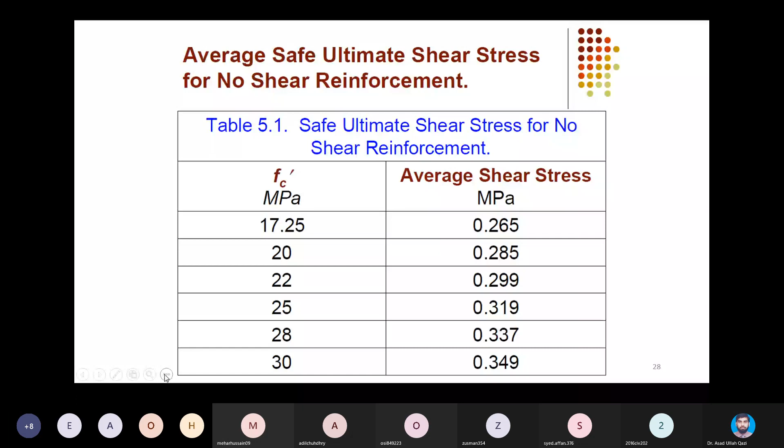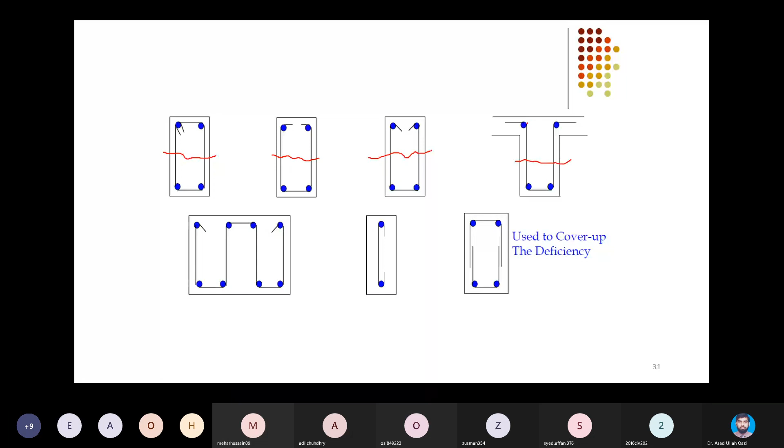In monolithic construction, this can be one arrangement that we are having a 90-degree bend, and on top the hanger bars or the main steel bars of the slab are engaged to hang the ties. Still not good for torsion because it is open from top.

It has four legs. Now when we need more area to resist the shear, we can increase the number of legs - single leg tie. This is one arrangement in which we are lapping the legs, and this is even good in case when you are actually extending the cross section, and just by overlapping the ties you are actually transferring the stress from one bar to the other. So this can be one arrangement to provide the shear reinforcement.

Obviously in that overlapping portion, if this overlap is not rightly calculated, then chances are that a weakened region will develop at this position.

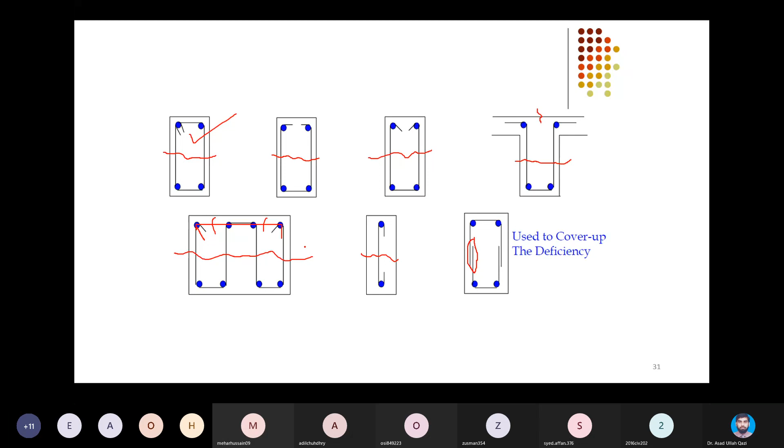So in order to handle the torsion, a closed loop will be more suitable. So area of steel means combined area of all transverse legs of stirrups at a particular cross section.

And I have drawn one picture that if there is a diagonal crack and ties are present which are bridging that crack, the spacing between the ties will be S, longitudinal spacing. At one section, the combined area of all legs will be the area of steel with subscript V, which is actually contributing at that section in shear resistance, and Vs is the shear strength provided by the stirrups at a particular cross section.

So if at one cross section we have area of steel, if there are two legs, as I have shown you on the next slide, the two leg stirrup present in the cross section, and in that two leg stirrup the area of steel used is number 10, for example.

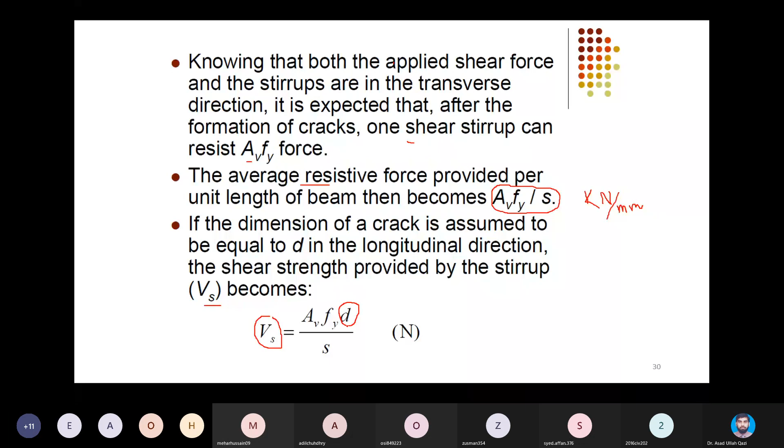So in this picture, I first calculated the force per unit length, then multiplied it with the distance on which the crack is present. This gives me the shear resistance offered by the steel. So AV is decided based on how many legs are present which are arresting the diagonal crack. In this above picture, we have 71 into 2 because there are 2 legs.

The shear strength reduction factor, according to ultimate strength design, that we will be using is 0.75. It is relatively lesser than the corresponding factor in bending, so it gives more factor of safety, firstly due to the sudden nature of failure, and secondly because of the larger scatter of the test results.

So even in the 2019 publication, with the proposed equation used to predict VC, the shear strength offered by the concrete, the capacity reduction factor applied is still 0.75. There is no revision made.

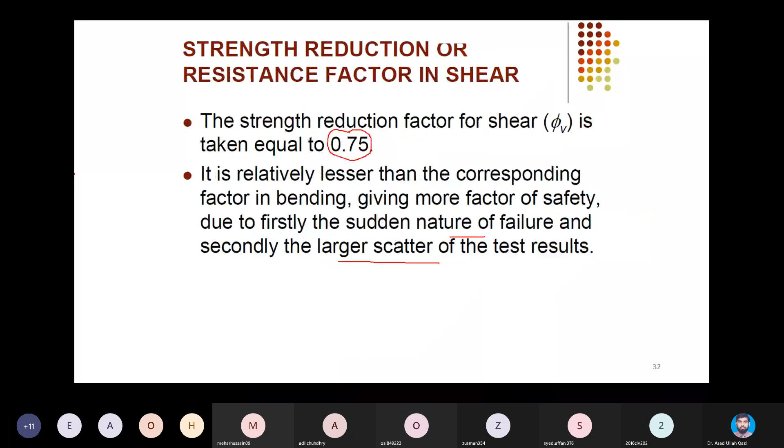considering factor of safety because shear failure will be greater, that provide minimum ties with area not less than, by using these set of equations, and from both of them larger will be selected, and it means I can write equation like this, that VU is

greater than phi VC by 2, but it is still less than phi VC. So it is greater, or even it will become equal to half of the concrete capacity, but it is less than the concrete capacity.

So theoretically speaking, shear is still less than the concrete capacity, and ties are not required, because if VU will exceed phi VC, then we will have a surplus shear which we want to shift to ties. But still, if the VU is less than phi VC, code will recommend you to provide minimum ties if VU will exceed half of the concrete capacity, but it is still below concrete capacity. But if it remains below half of the capacity, then you can ignore provision of ties.

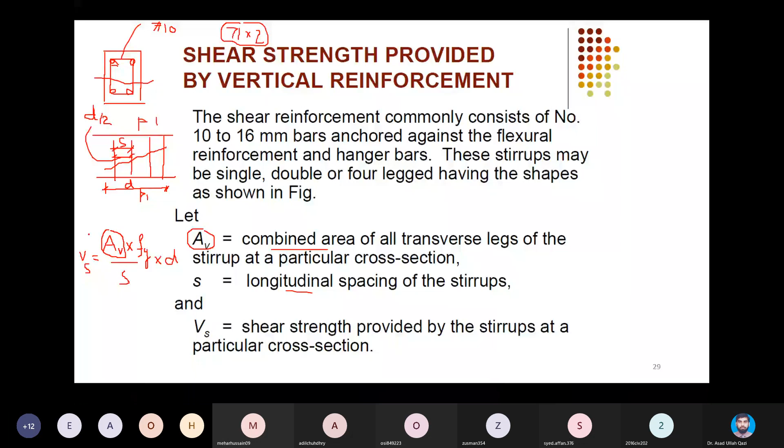So it is important to note that the maximum spacing limit of d by 2 is also required to be satisfied for this minimum web reinforcement. So once you will calculate the web reinforcement from this equation, the idea is that either you will put AV first. For example, I decide that I will keep S as unknown, and I will put AV first, and according to that AV, what spacing this equation gives me.

For example, if I decide that I am putting double legged number 10 stirrup, so I am putting this 2 into 71 here, that equation will then give me how much is the spacing between the ties, where minimum requirement is governing. So if this spacing comes out to be greater than d by 2, I have to provide the spacing not exceeding d by 2. So this is one choice.

Second, whatever spacing you have decided, d by 2, you will put over here - you know the effective depth of the cross section, and you will put d by 2 over here. What is the code maximum limit, and according to that you will calculate AV minimum.

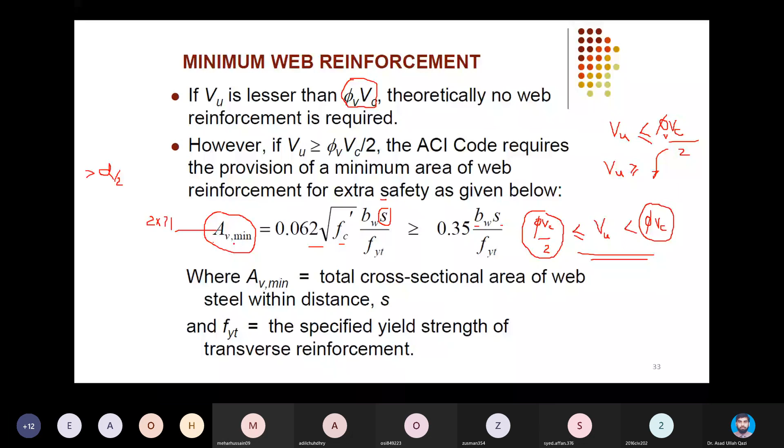Exceptions where this minimum reinforcement is not required are members that have capacity to redistribute stress across the width of the member, or in some cases to adjacent members, with examples being slabs and footings, and concrete joist construction.

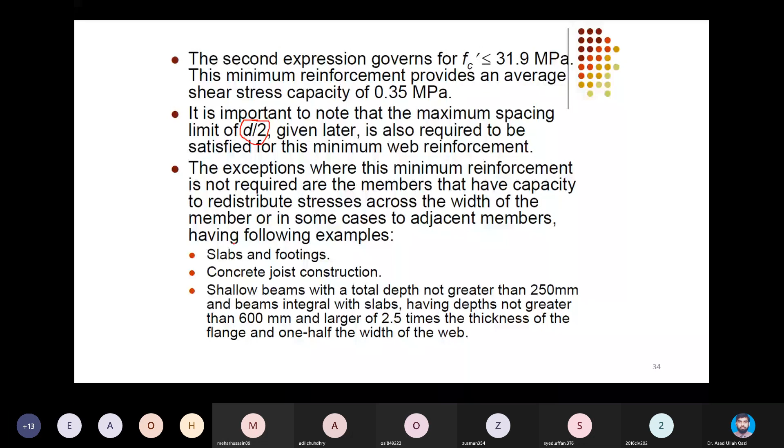These bullets are already explained on slide number 27. So when you have cases where AV minimum is not required, those cases are already summarized, so you can read them, because at the moment we are only discussing reinforced concrete beams. There are some exceptions which are summarized, which you can review later on.

One more important thing I want to discuss before starting the solution of the problem: for non-prestressed sections located less than a distance d from the face of the support, they may be designed for the same shear Vu as that computed at a distance d. So what does it mean?

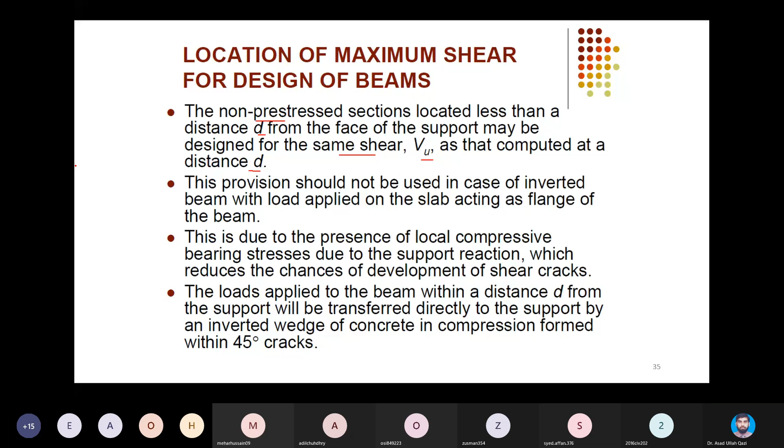I will discuss this from this picture: the code recommends you determine the shear force at a distance d, which is actually the effective depth of the cross section. So you can move to a distance d from the face of the support.

At that section, the shear force you will calculate will be the design shear force, against which you will check whether this VUD is greater than phi VC or not greater than phi VC.

So actually the design shear force is not at the face of the support. You can move to a distance equal to the effective depth, and this shear force will be considered as the design shear force.

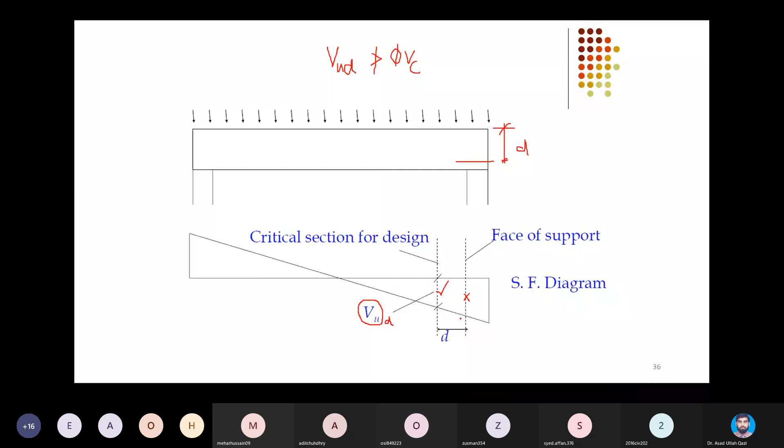What is the reason for this? This picture is good to understand. Look at the beam in which load is applied on top, and imagine if it is a monolithic construction, there will be a flange over here, the slab which is present.

And on top of it, load is present. So the load which is present within a span d from the face of the support will be transferred directly to this support.

This load has no effect on the stresses over a crack, while the load which is away from distance d from the face of the support - this load or the shear force at this distance - will actually affect the stresses over the crack, and the ties which are going to resist that force will actually be taking the share of the load which is beyond the distance d from the face of the support.

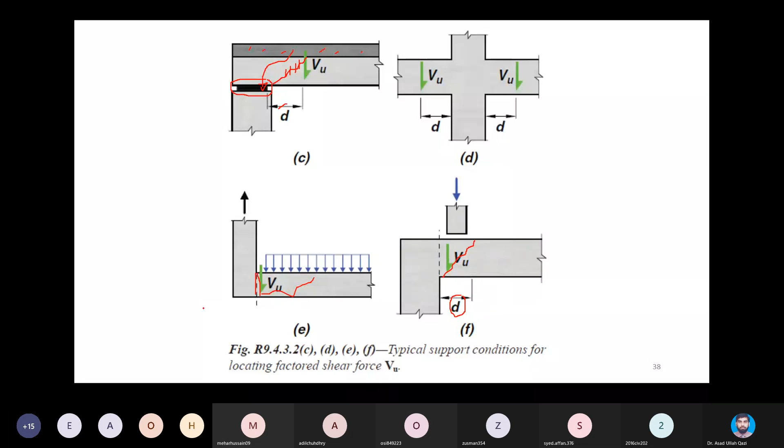If your beam is framing into a member which is subjected to tension, again in this case the critical section will not be at distance d from the face of the support, it will be on the face of the support. Such guidelines are present, and I have copied this picture from the ACI code. You can find some more pictures in that document which I have shared with you.

Now one more important piece of information: how much maximum stress we can pass on to the ties. It is not a permission - there is no permission to transfer surplus shear to ties without taking into account how much maximum Vs is permitted by the code, because if we transfer more extra shear to ties, it will result in widened cracks, and we need to keep the crack widths to a minimum.

So there is a limit given on Vs, and that limit is 66% of the square root of Fc prime. If the stress will exceed this on the shear rings, we need to then change the cross section, because we want more Vc.

So more Vc we can get by either increasing the compressive strength of concrete, or by changing the cross section. We need to check first whether our cross section is good enough, and if Vs will exceed this value, we need to revise the cross section.

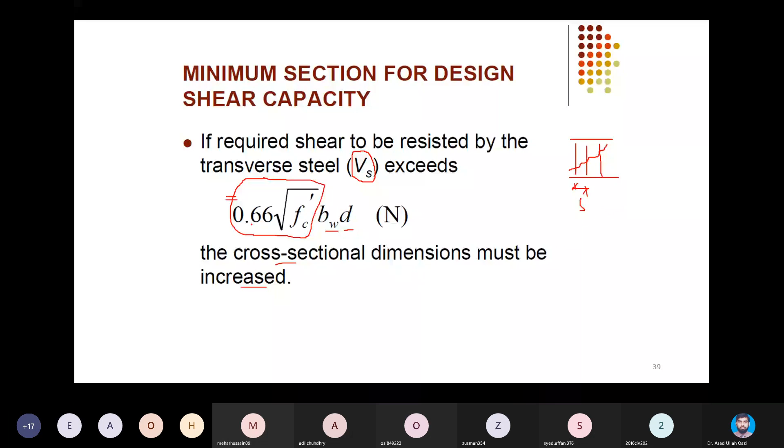Actually, the section is suitable if your Vs is less than or maximum equal to 0.66 under Fc prime. On slide 39 it was 0.66, and this is actually half of that - Vs divided by 2.

So if your Vs does not exceed 33% of under Fc prime, then the maximum allowed spacing between the ties will be calculated by a set of equations, and out of them the smaller spacing will be selected.

In addition to this, the fourth equation will be the design equation we have discussed, which we calculate based on the equation AV Fy D over S. We did this assessment on the previous slide.

So what we will do: we will have these three sets of equations, and furthermore, if our Vu is greater than phi Vc, it means we will have a surplus shear, and we will say Vu minus phi Vc, and that additional amount we will transfer to phi Vs.

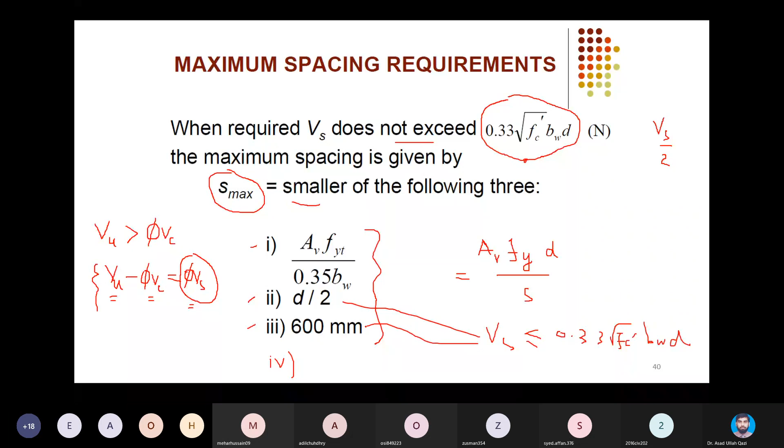less than or equal to 0.33 under root Fc prime BWD, then it was d by 2 or 600. Now since it exceeds 0.33, it is now dropped to half of that. So rather than d by 2, it is now d by 4. Rather than 600, now the requirement exceeds and the spacing drops to 300, half of the previous recommended.

So the spacing between the ties, maximum, should be the smaller out of the 3, and we will also put the fourth one, which is the actual design requirement, and that is explained here.

Now what I mentioned is that you have the nominal shear Vn, you multiply it with phi to get the ultimate. So this will be our equation according to ultimate strength design, and this phi Vn we are going to replace with the ultimate demand, the ultimate shear force.

So since, as I mentioned, if Vu is greater than phi Vc, what will happen then? It will be Vu minus phi Vc, and on the right hand side it will be phi Vs. So what we are going to do is calculate, based on that surplus demand, what spacing is required.

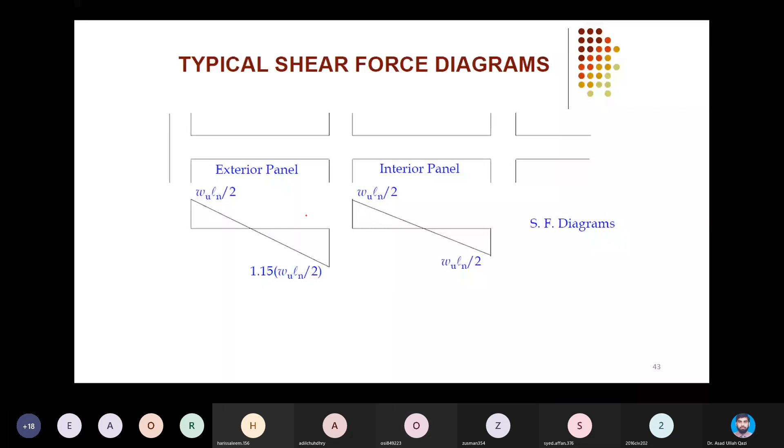Now there is a flow chart which I want to skip, because I am going to solve the problem directly. Once you go through this example problem, you can read the flow chart later, which will help you further understand the solved problem. This example problem is in SI units. I will also share with you one problem from the book by Nadim Hassoun, 7th edition, also in SI units. Both example problems are good to understand the flow chart of shear design of beams.

The beam has a clear span of 4.5 meters, and imagine that the support width is 300 millimeters on either side, 300 by 300. So if I want to determine center to center distance, it becomes 4.5 plus 0.15 from either side, so it becomes 4.8 meters for center to center distance.

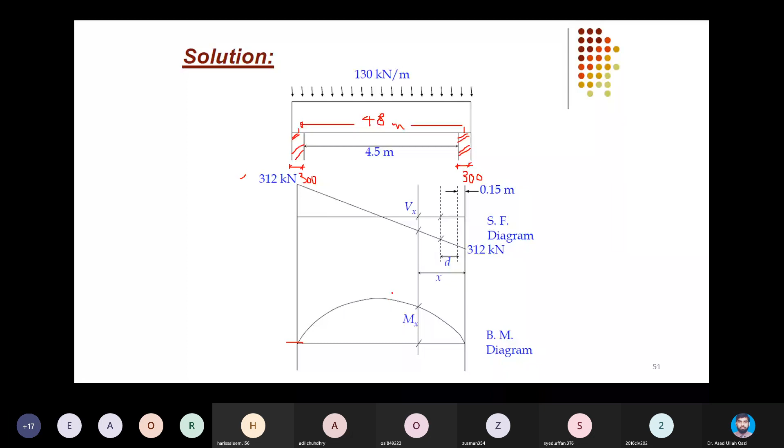Clear span is 4.5. You are expert in plotting shear force and bending moment diagrams. Plotting the bending moment diagram was mandatory when we were applying the equation proposed by ACI in the 2011 publication and also the 2014 publication. But now in the 2019 publication, they have provided more simplified equations, so calculation or application of the moment diagram in estimation of VC is no longer required.

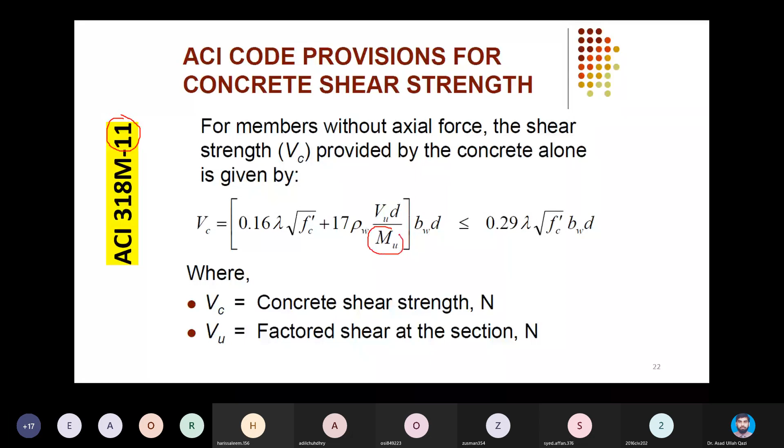Earlier codes required calculation of M because in our equation M was also present. Just to give you a hint about this, in the 2011 publication there was an equation which involved MU, but now I am applying the 2019 equation. There is no MU involved in calculation of VC, so it means the moment diagram is no longer important in calculation of VC now.

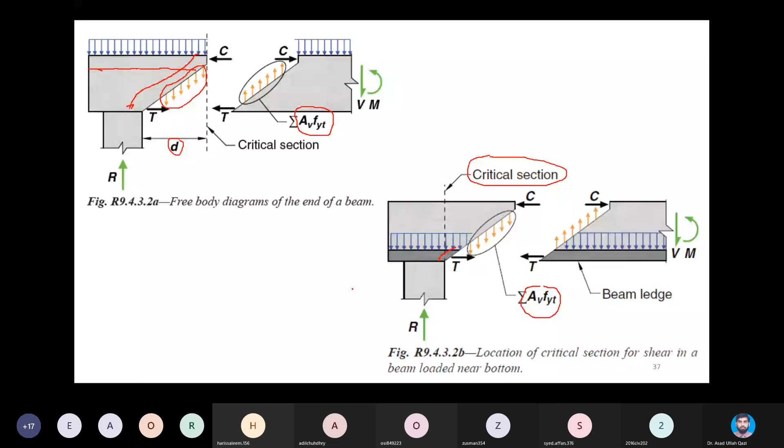They have now directly given you some multiplying factors along with the reinforcement ratio and the concrete grade. In one equation, the size effect is incorporated by giving you one coefficient, lambda s. So it is now more simple to determine VC by following the current ACI code equation.

As we discussed, load is present on top - imagine there will be a slab if it is a monolithic T-beam. Even if it is a rectangular beam, load is present on top and a diagonal crack will form. The load up to a distance d from the face of the support will have no contribution to the diagonal crack stresses and will be transferred directly to the support. So it is recommended to determine the design shear force by moving a distance d from the face of the support. We are not interested in the shear force at the face of the support; we are interested in the shear force at a distance d from the face of the support.

We can write the shear force equation. As I said, the moment equation is no longer as important if we are applying the 2019 equation. So our shear force diagram is obtained by moving a distance d from the face of the support.

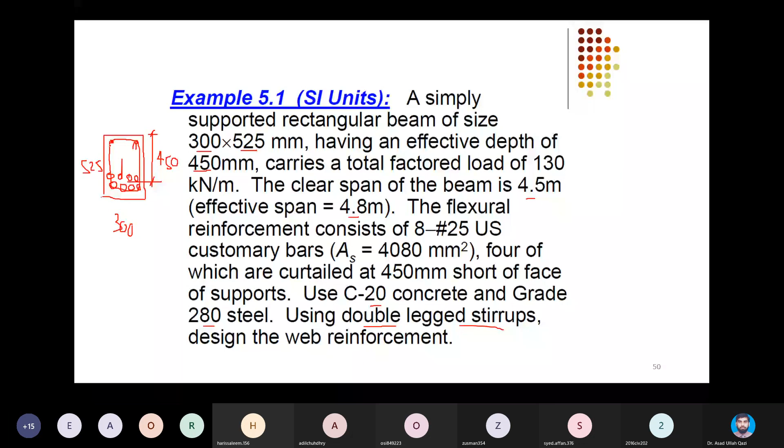The flexural reinforcement consists of 8 number 25 US customary bars, 4 of which are curtailed at 450 short of the face of the support. Concrete and steel grades are also given, and they are suggesting you use double-legged stirrups. That is the reason I have detailed it as double leg - one leg and second leg. So it is a double-legged recommended tie.

There is some idea given regarding the curtailment, so let me explain this with a picture. I will discuss this further when talking about the bar bending schedule.

Just to give you an idea, I am drawing the beam's first layer of steel which penetrates inside the support to a distance of 150 millimeters from the face of the support. It goes in, and the recommended distance by the code is 6 inches, or 150 millimeter. The reinforcement must enter the support even for simply supported beams.

The second layer, which is again 4 number 25, is what they recommend you curtail. You can cut the bars before reaching the support, at a distance d before the support, for this second layer.

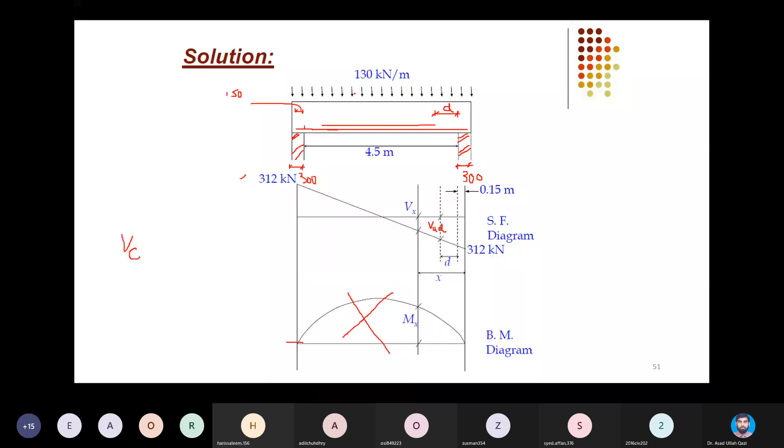Why do they do so? Because the moment diagram is parabolic. The steel required is actually at the midspan, which is 4 plus 4. So as you move away from the midspan, your moment is dropping. So at this section, your moment magnitude is relatively less than the midspan maximum moment against which you designed two layers of steel. That is the reason we normally curtail bars where the moment demand reduces.

That will be our topic in RC2. Here they are talking about the two layers, and they recommend in the statement that the second layer is curtailed before the support to a distance equal to the effective depth of the beam, and the effective depth of the beam is actually 450 millimeters. So this is one idea given to you by the statement.

Now, shear and moment at the critical section: since we stated that we will move to a distance d from the face of the support to get the design shear, what will that be? 312 reaction minus 130 into our effective depth, which is 0.45.

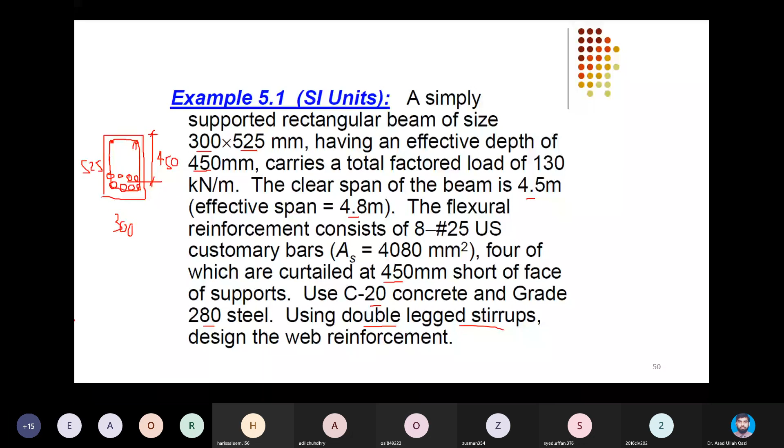Now in calculating rho W, don't forget that two layers of steel are present at the center. At a distance d from the face of the support, they are cutting the second layer. So strictly speaking, rho W at distance d from the face of the support is with reference to one layer of steel, because half of the steel is curtailed. That is why they divide the total area of steel, which is 8 number 25 bars, by 2, to get the reinforcement ratio at a distance d from the face of the support.

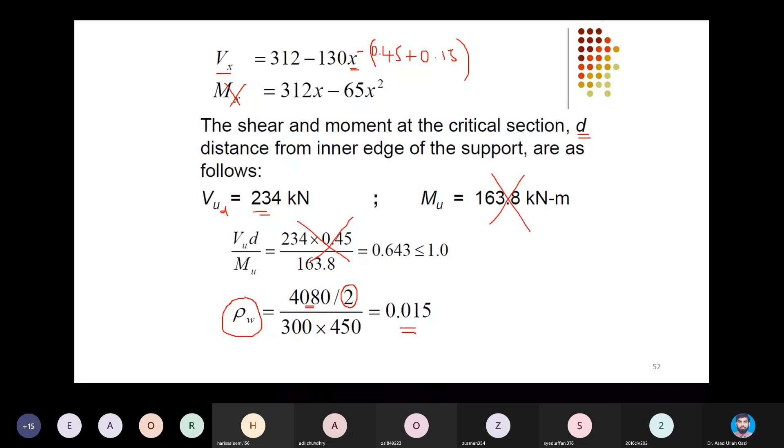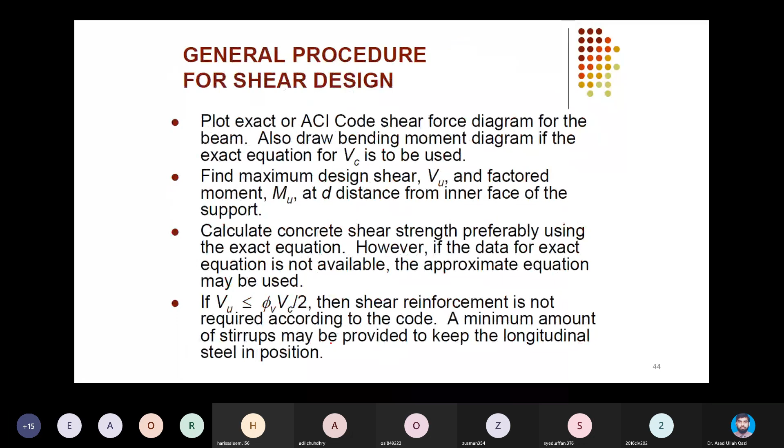Now I will not apply this equation, because as per the latest ACI code, I am going to apply the equations present on a specific slide. Let me take you to that slide - I remember the number so I can quickly jump there. Yes, slide number 25.

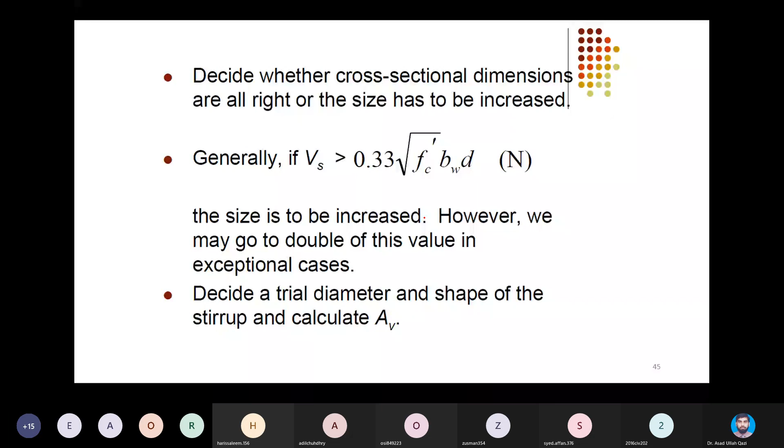Let me go back to my slide where I will call this equation. The first equation of 2019 tells me that VC is 0.17. I need your help to apply those equations.

So this is one of my equations which is present in the current code, I may call it equation A. It is along with BWD. In the second set of equations, VC equals, we will put phi as well later on, it's just nominal, 0.66. That was the second set of equation. Lambda is the lightweight aggregate factor, so it will remain neutral. Then there was rho W with power 1/3. Then there was FC prime into BW into D.

So there are two equations present on slide number 25. Let me take you to that slide. So I have reproduced them: 0.66 lambda rho W FC prime under root, either of them. Can you help me? That first equation gives us how much, our concrete grade is 20, so 20 megapascal is FC prime. Can you calculate from equation A how much is VC?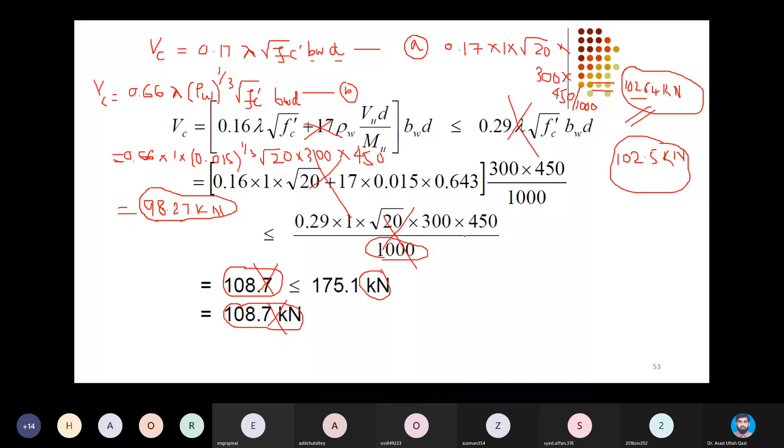So in your books, if you follow the previous edition of Z.A. Siddiqui or MacGregor or Nilson, you will get these equations which are present on the slide, which I have now crossed. But even if you attempt your problem with the previous set of equations, I will not mind. But it is always advisable to follow the new set of equations because better prediction is based on latest research and better equations are proposed. So it is now 102.5. Fine, so I will keep on modifying it.

102.5 you have selected as VC. So multiply with 0.75. So what is our latest phi VC as per our latest code? How much will this become? Phi still 0.75. VC, 102.5 into 0.75, because now we are multiplying the nominal with the phi.

Sir, 76.88. 76.88 is our phi VC, and we need half of it because we want to apply all the equations. So it is recommended to check whether your demand is greater than half of the concrete capacity. 76.88 divided by 2, how much? 2 3s are 6, 2 8s are 16, 38.44.

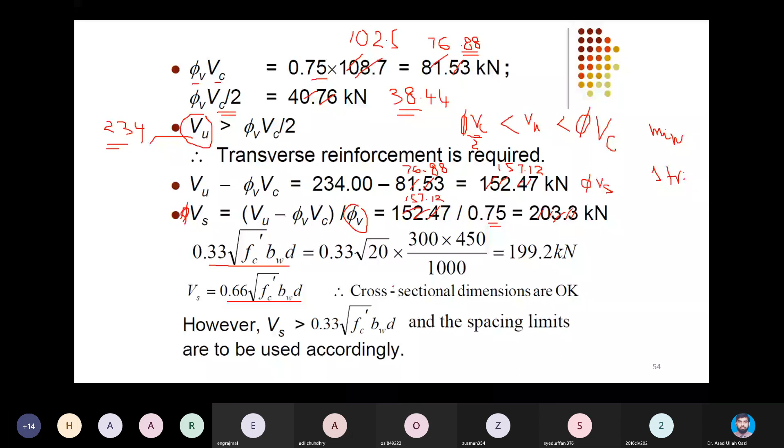And I will bring that phi, it is actually phi VS, which is equal to 157.12. But I will bring that phi as denominator on the VU minus phi VC, which is 0.75, to get how much is VS, because I need to check that my VS is how much, because if VS will exceed this, I need to revise the cross section. It was suggested by code that the maximum you can transfer to the ties should not be above 0.66 FC prime, and if it is above 0.33, there were strict requirements of spacing.

So 157.12 divided by 0.75 gives us VS, which I want to compare against these two limits. So please tell me what is VS by dividing. Sir, 209.5. Good, 209.5.

Good. So incidentally, when I calculate 0.66 FC prime BWD, I am satisfied because 0.66, which is the cross section suitability requirement, I am pretty okay with the demand transfer to the steel ties, because 0.66 into 20 under root will give me quite, into BW 300, D 450 will give me quite high value, which can be transferred to the ties without any problem.

But when I check 0.33 under FC prime BWD, I get the idea that this limit is 199.2. But incidentally, my VS is greater than 0.33 under root FC prime BWD.

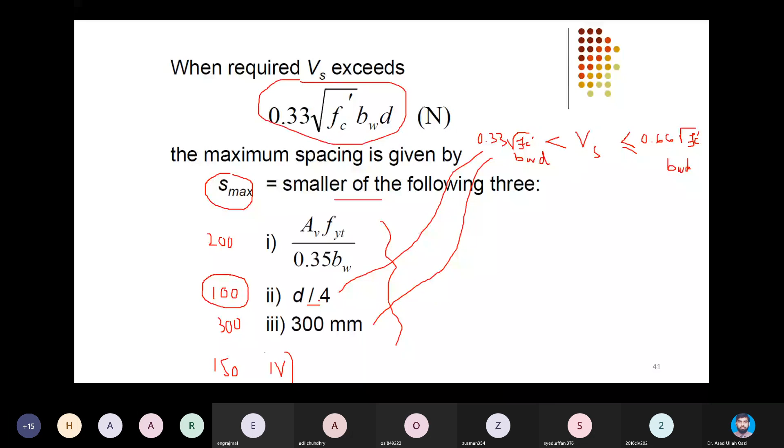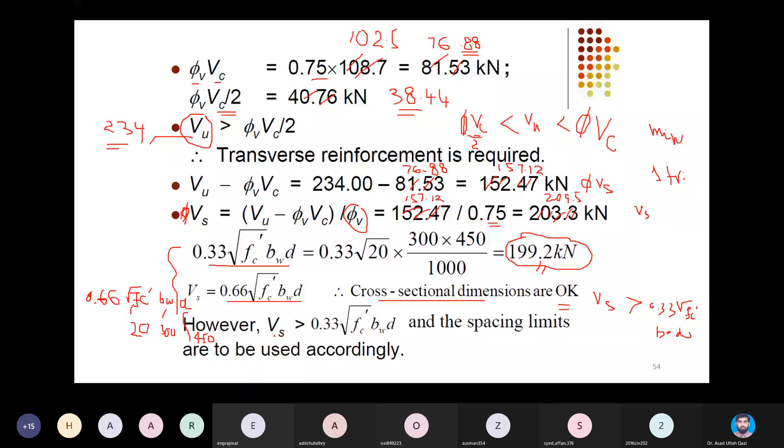And what are those limits? 1, 2, 3, and 4th our actual equation. So I decided that I will be using 2-legged number 10 tie. So it has one leg of area 71, so into 2, it will become 142.

VU minus phi VC, what we have calculated, was 157.12. So it will further reduce. How much is it?

How much is it? 0.75 into 142 into 280 into 450 divided by... Sir, 85.4. Good, 85.4. So let it be 85, round value, because it is easy to measure during layout, multiple of 5 or multiple of 10. So 85 millimeter.

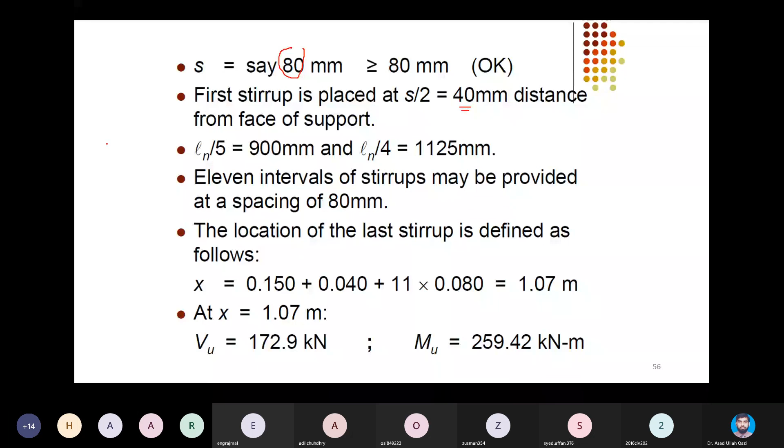And in this problem, even against 88, they are suggesting to round up to multiple of 10. So 80 is suggested. So the first stirrup, code recommends to put at distance half of the spacing, 40, and then onward 80, 80, 80. It means the first will be at 40 and then all others are at 80, 80.

Since your shear force diagram is reducing, so at some distance further away from the support, if shear drops to a lower value, we can select any other section at some distance further away from the distance d from face of the support, and against that we can calculate the latest requirement of spacing, because this 80 actually is exactly at distance d from face of the support. So constantly you are seeing that there is a linear decrease in the shear.

Strictly speaking, at every slice away from the section at distance d from the face of the support, since shear force is decreasing, you can increase your tie spacing. But practically, you can't change tie spacing after every tie. Such a layout would be tedious and the saving would not be much. What we do is keep spacing constant for a reasonable distance until we get a reasonable drop in shear force, then at that section we calculate VU again and repeat the same flow chart: calculate phi VC, subtract, use the 4 set of equations, and calculate S.

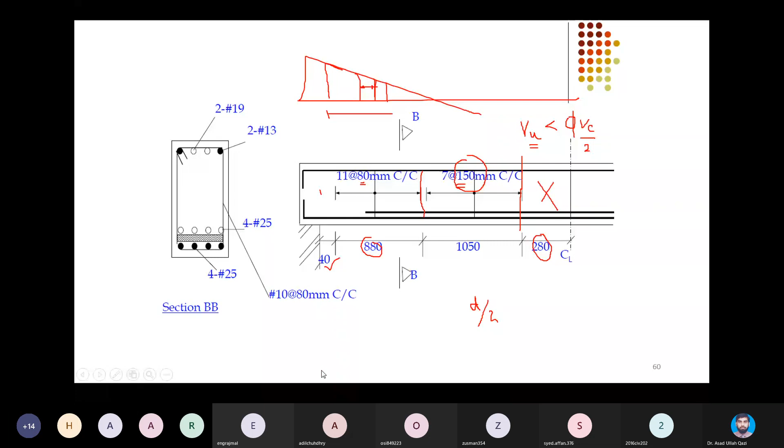So in this way you can see the remaining part of the problem solved. In addition to that, I recommend you, since I have shared with you on the Teams folder...

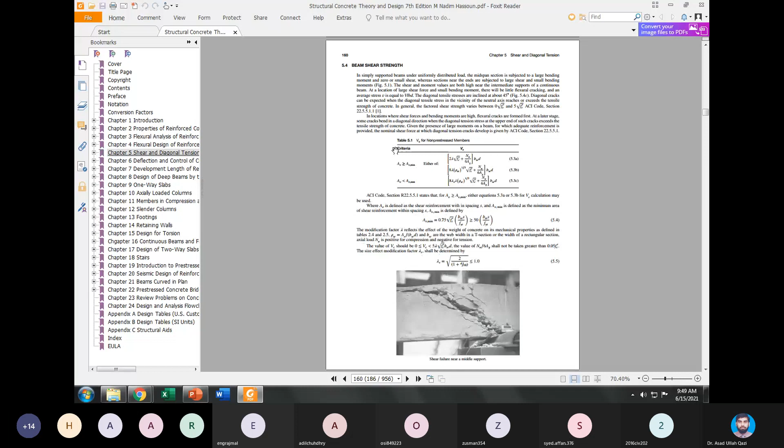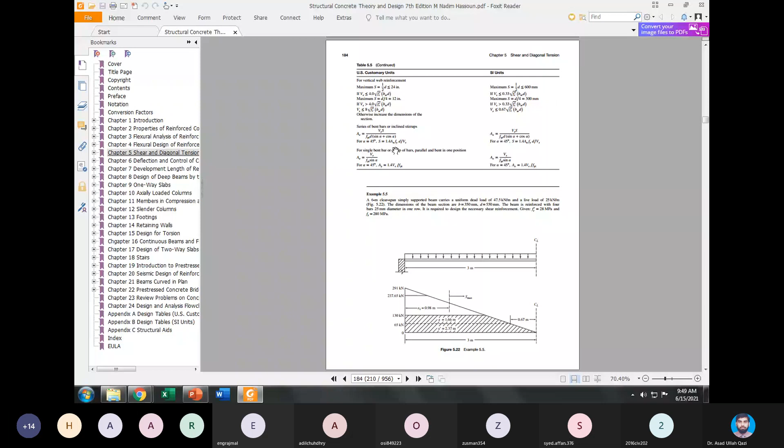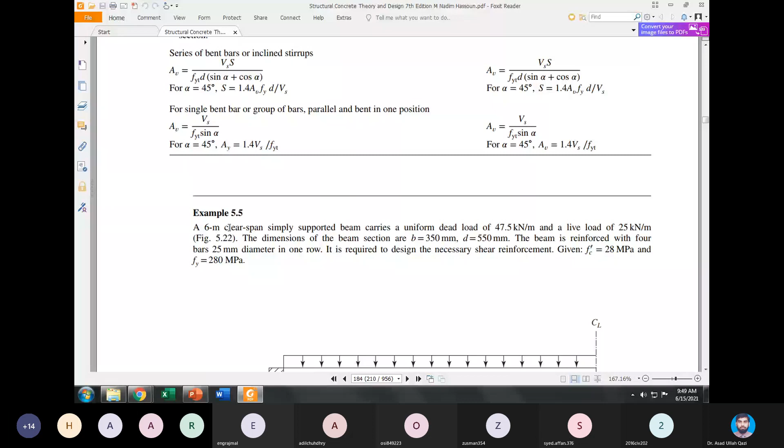This book by Nadim Hassoun, 7th edition - in this book when you go to the shear and diagonal tension chapter, chapter 5, you will find a problem in SI units. The good part is there is a very good example problem, a complete problem discussed by the author on page 184, example 5.5, and he has solved this complete problem using the latest ACI 2019 publication.

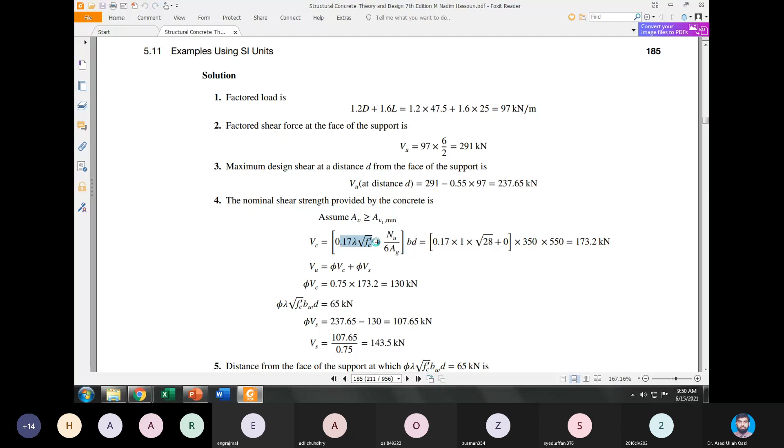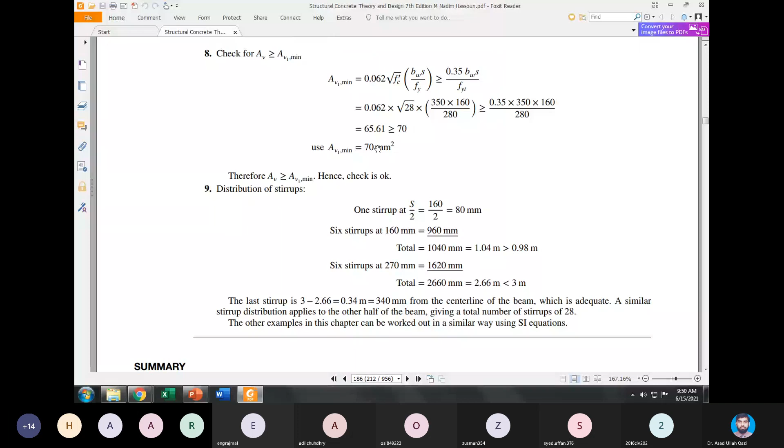Please attempt this problem at home. In that way you will understand all the checks which are required. We have also checked AV minimum - that the area of steel, wherever we need the minimum requirement of ties, would not be designed below AV minimum. That check he has also applied, and then finally the distribution of stirrups is discussed.

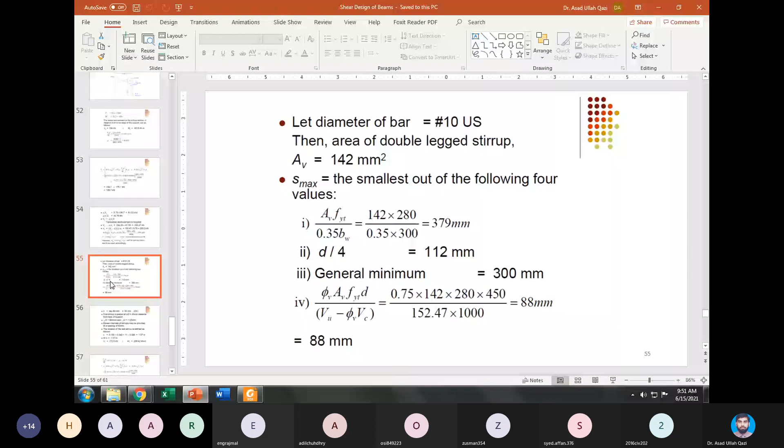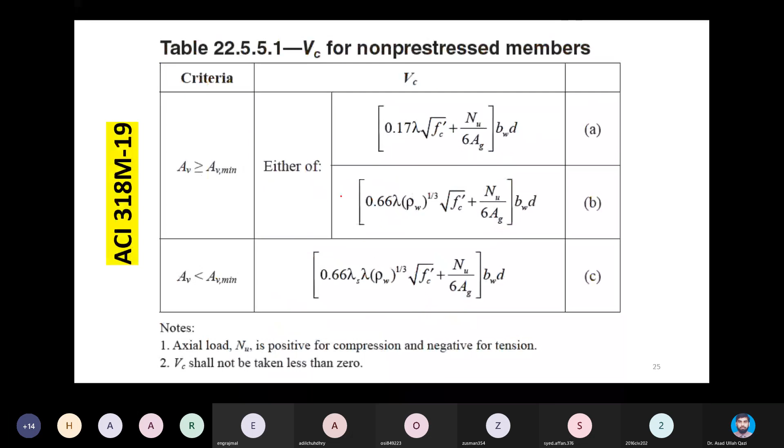The first tie is provided, and in this presentation you will find they are using the previous equation. Wherever they calculate VC from this equation, you need to discard it and instead calculate VC from the equations present on slide number 25. So you need to repeat this problem - it is easier now to calculate VC. What you need is the latest VU, which you compare with VC from the equations on slide 25.

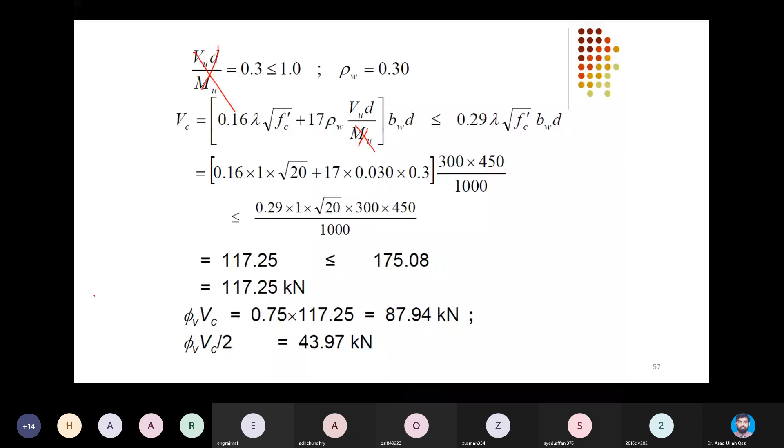For the next portion, they calculated the spacing as 150. If you provide the same 88 millimeter spacing throughout, you are over-designing, because the shear force was linearly decreasing, so you should increase the spacing between the ties as shear force drops. If you have a beam with a point load where the shear force diagram is constant, then you need not change the tie spacing since shear force remains constant.

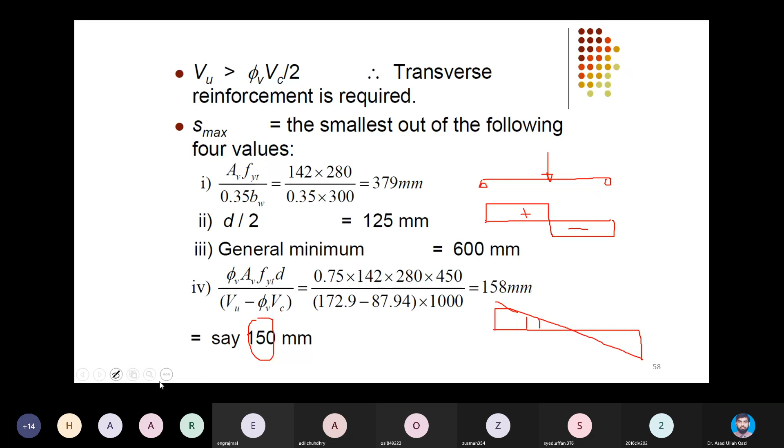But in case of a uniformly distributed load, you have a linearly varying shear diagram, so since shear force is decreasing, you can widen the spacing between the ties. In this way, the shear force diagram decides the magnitude of shear, and correspondingly what the tie spacing will be along the length of the beam.